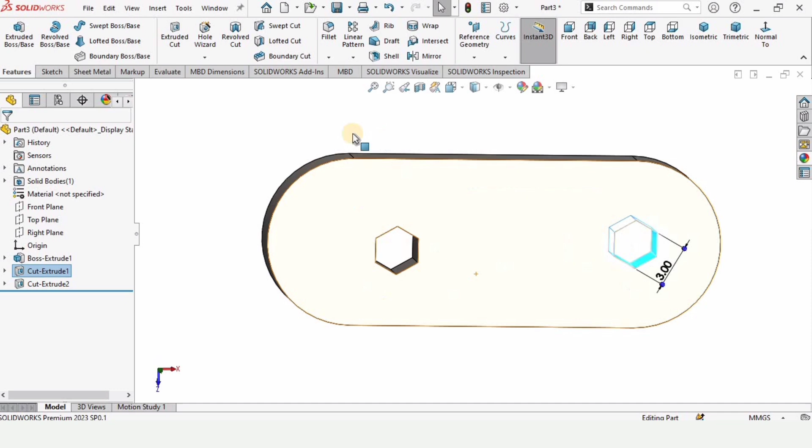So let's begin. Open a part file, guys, because we are working in the part file. First we will model and then we will learn how to copy. Make sure that MMGS is selected as units. Change the background to plain white.

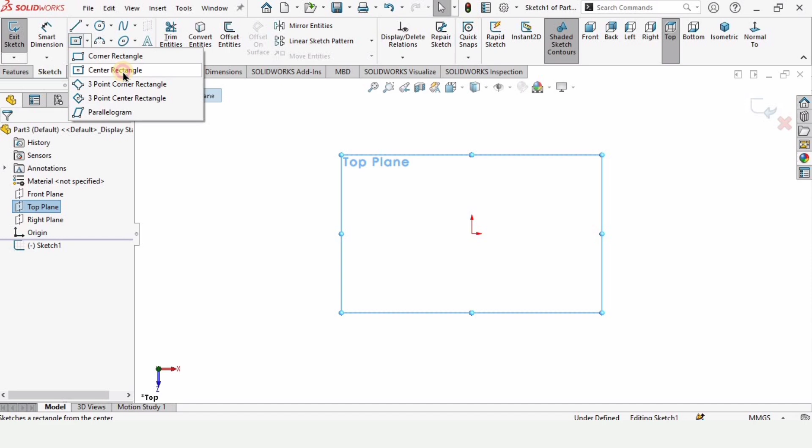Click on top plane, select the sketch, and select center rectangle. Click on this center point and make a center rectangle like this. Now select smart dimensions. Select this line and set the dimension as 20 millimeter. Similarly, select this line and set the dimension to 12 millimeter.

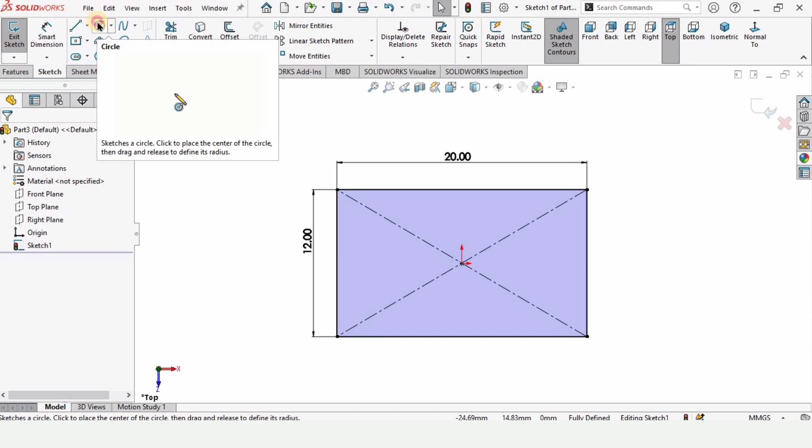After that, select the circle. Find here the midpoint and this corner point, make a circle like this, and similarly I want to do the same procedure on the other side like this.

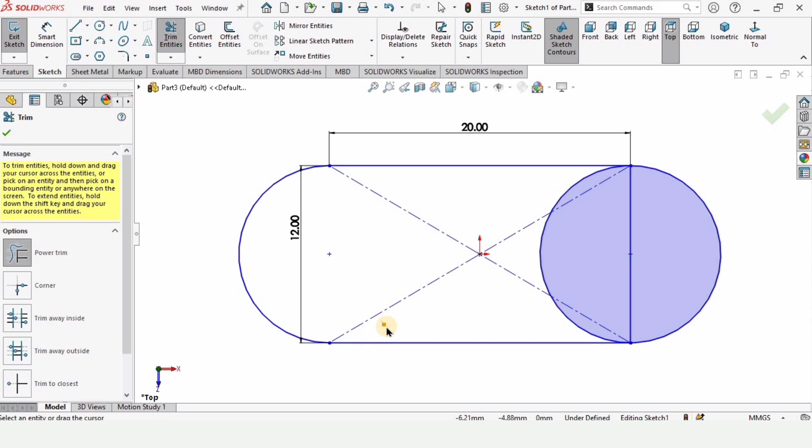And now select this trim entities command. Just trim these lines. Make sure that you have selected this power trim. You can do it by using your mouse. You need to drag it like this to trim.

And one last one, and as you can see the whole sketch has turned gray. This means that this sketch is ready to be extruded.

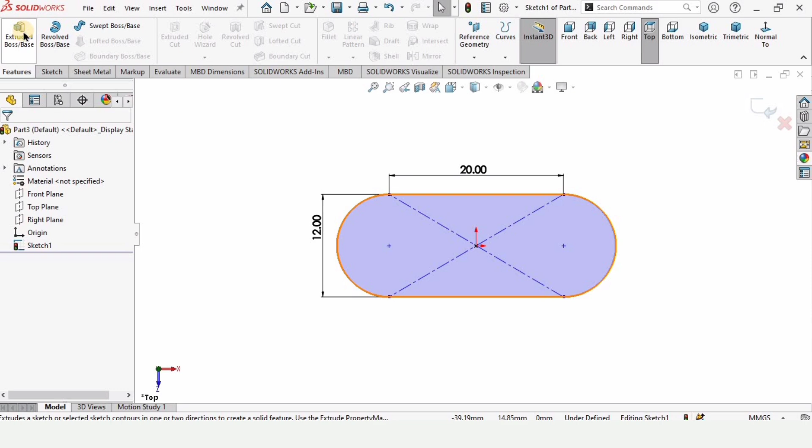So go to features and extruded boss base. We are going to extrude it, and here we have to specify the length of extrusion. I would specify here 3 and simply check this box.

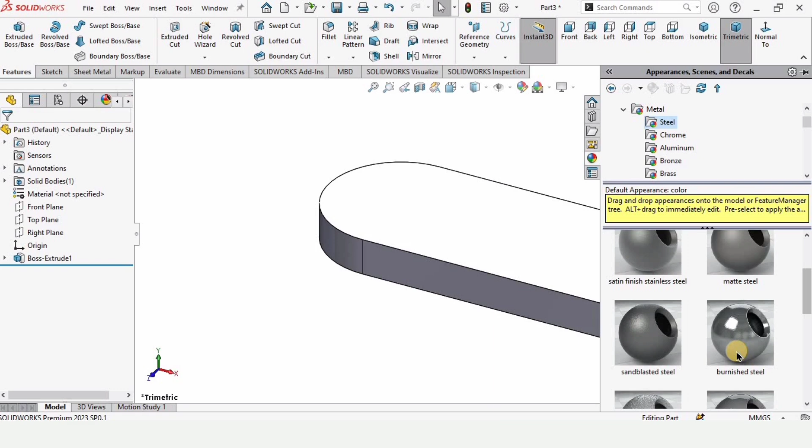Let's apply some appearance, guys. This is an optional step, but it makes the part good in appearance. You can select any appearance from here.

Now select this surface and click on sketch option, and here I would like to select this hexagon. Trace the center point, guys, and make a hexagon. Now press the escape button.

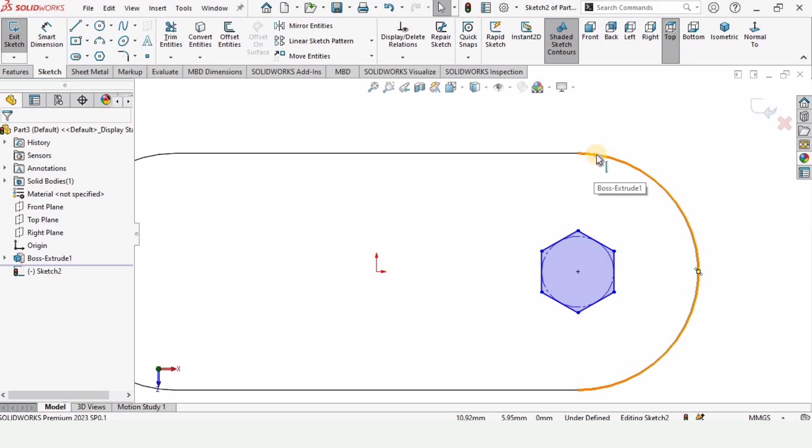Now press control button. Do not release the control button. Select these 2 points and make relation as vertical.

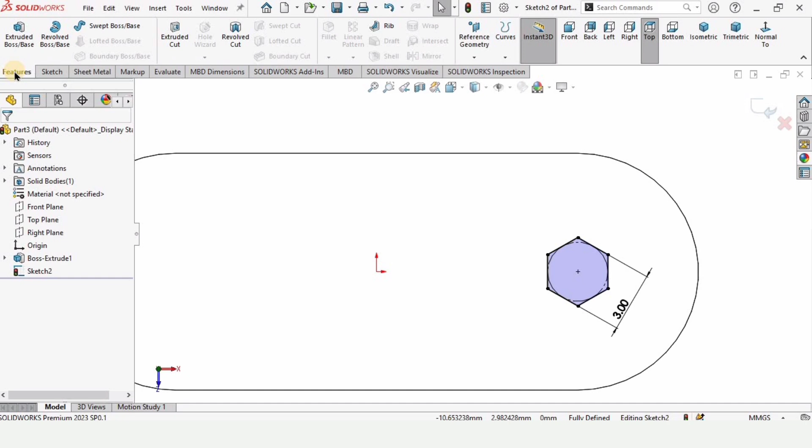Check this box, and now select smart dimensioning tool and specify the length of this area, these 2 lines, 3 millimeter. Check this box, go to features, and I want to cut this, so extruded cut.

As I want to cut it through, so I will select through all and check this box. And now what I will do, I will copy this sketch over here, right guys?

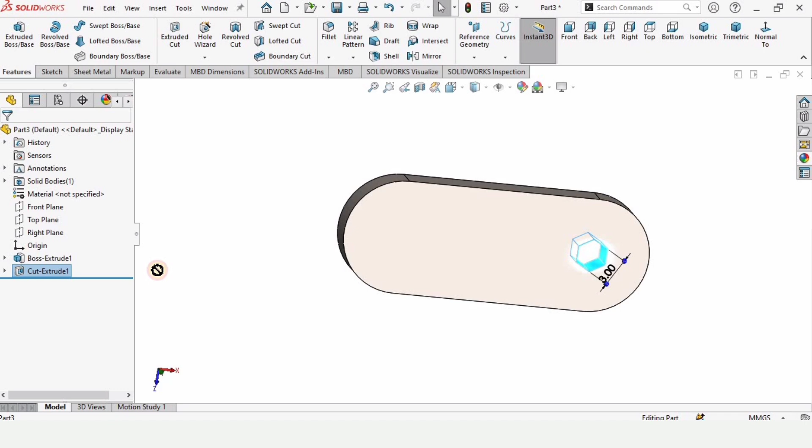So for that, press control button from your keyboard, drag this cut extrude and place it over here. Select this option, and here we have the copied feature.

Now we have to specify the dimension, so click here and select edit sketch. We can define it as under defined sketch, so we can press control button, select this point, do not release, escape button, and make relation vertical.

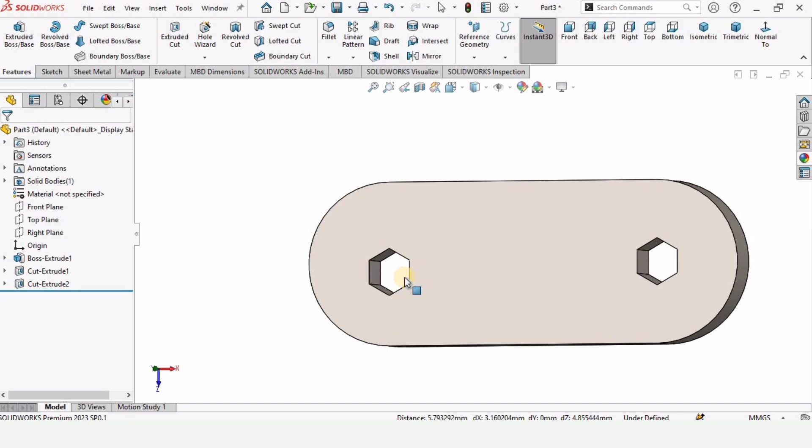And since it's a little bit down, guys, here you can see it's a little bit down, so go to edit feature again, press the control button, select these 2 points, 1, 2, and what I will do, I will make relation as horizontal. And as you can see, guys, this is shifted upward, and this is the proper position of this one.

Press the exit sketch button, and here we have the part.

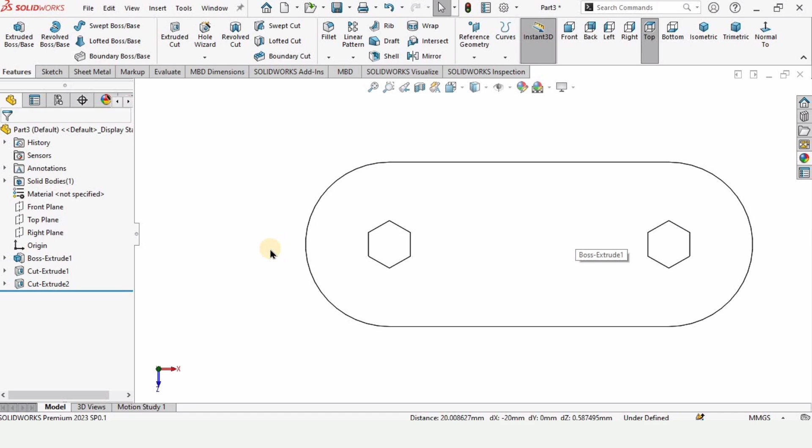So in this video we have learned how to copy a feature and paste it in SolidWorks.